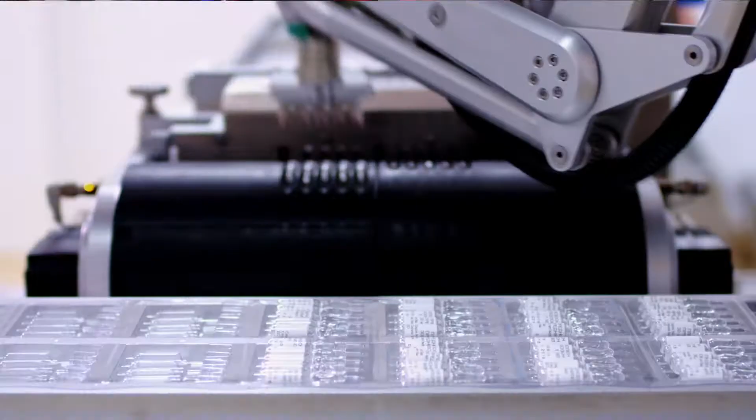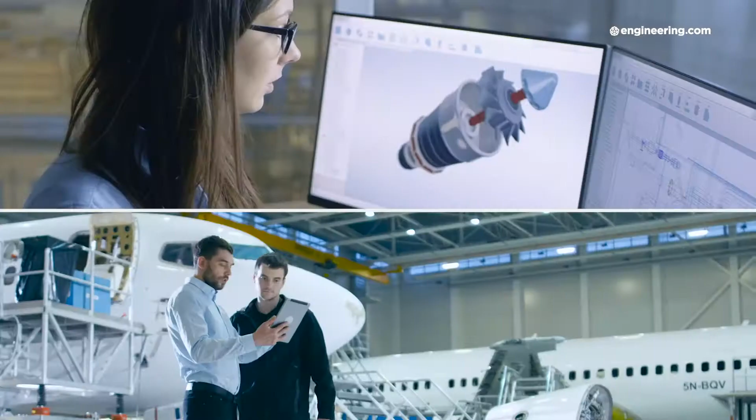One of the best parts about working here at Engineering.com is the opportunity to meet so many smart people in industry. Now, software has always had smart people, but the traditional intersection between software and engineering, CAD/CAM, that's morphed into something much bigger and much more important than most people realize.

I was a panelist at a recent roundtable hosted by Dassault Systèmes, their 3D Experience Forum, where I commented on the current state of the art in software-assisted engineering, model-based systems engineering.

We've all been watching advancements in artificial intelligence, augmented and virtual reality, simulation, and generative design, but these technologies, although important, they dance around the fundamental core of engineering.

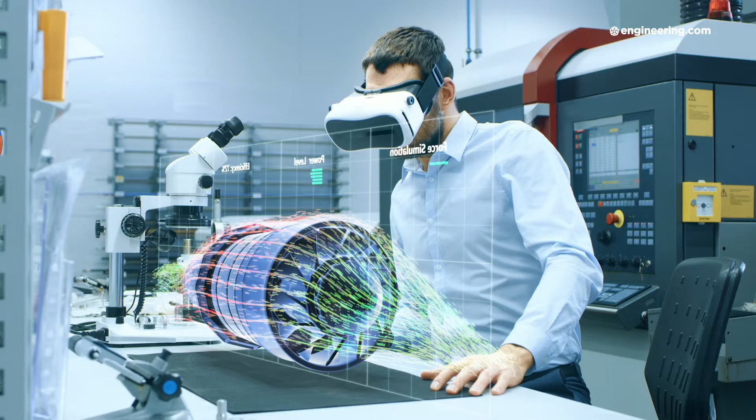Artificial intelligence does what human engineers do, presumably faster and with fewer errors. Augmented and virtual reality are the logical extensions of 2- and 3-dimensional rendering. Simulation is the virtualization of hardware-based R&D, and generative design is simply the automation of what every design engineer does every day in developing new parts and assemblies.

They're all essential, but they don't fundamentally change the way engineering is done. Model-based systems engineering, however, is different. This is about removing the handcuffs that constrain every modern engineering project: documents.

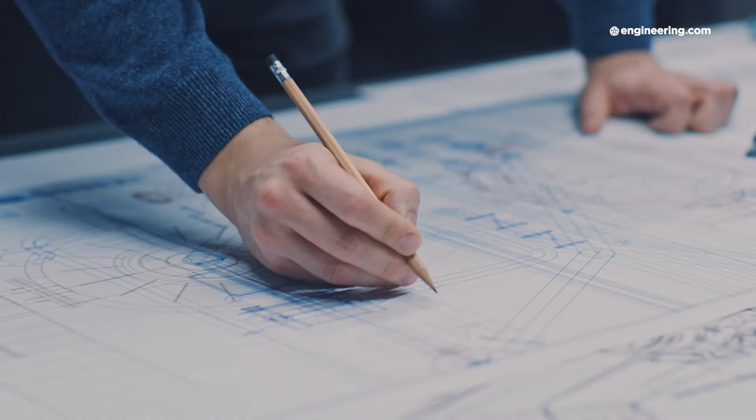System complexity in engineering has always been a problem, and with the advent of commercial digital computers in the 1950s, major defense programs became too complicated to effectively manage.

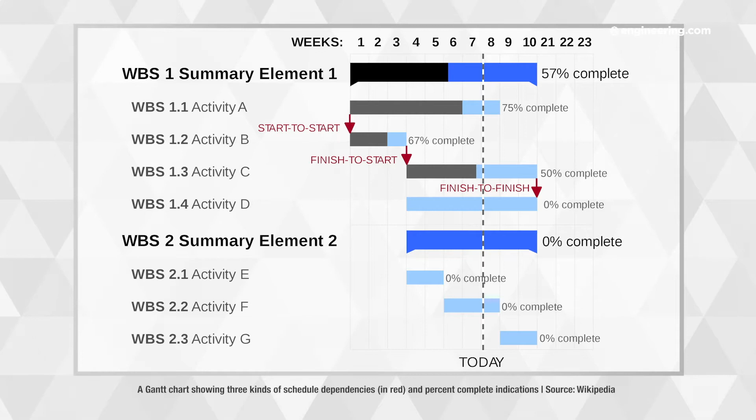Determining the critical path on a large Gantt chart was the only way to handle most problems, and the need to police revision histories on thousands of individual part and assembly drawings, plus associated documents related to testing, regulatory compliance, quality, and scheduling within major projects, that basically guaranteed that projects would come in late and over budget.

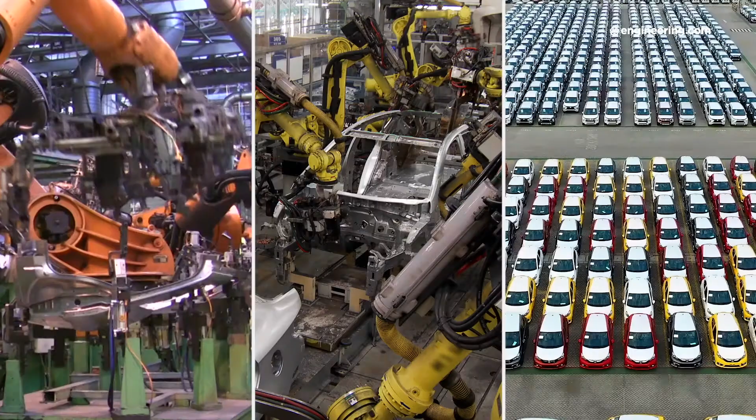Cost, delays, and the root problem of getting dozens or hundreds of engineers' designs to come together into sub-assemblies, assemblies, and final products, it's been a perpetual issue, whether the project was an electric toothbrush or an Apollo moon rocket. But why? In my opinion, there are two primary reasons.

The first was, and is, simple. Projects are costed relatively early in the design phase, and there's no way to effectively predict how much redesign may become necessary, or in the event of a poor design making it all the way to production, the eventual cost of rework. For large projects, especially in defense, the only way to get a big project across the finish line was either to price new projects at astronomical levels or negotiate cost-plus contracts, or both.

Now, the second reason was and is simple. With each individual engineer responsible for one part or one subassembly of a large project, their motivation and their metric of success is determined by the functionality, cost, and optimization of the single thing that they work on. Integration of that part into large complex assemblies like airplanes or automobiles was typically handled by a different engineering team responsible for integration.

The result was the inevitable negotiation and horse trading to get parts into subassemblies and then into assemblies and on into products. Now, all of this costs time and money.

The brilliance of model-based systems engineering is that a single digital concept of a large and complex product is accessible to everyone at every level of product development.

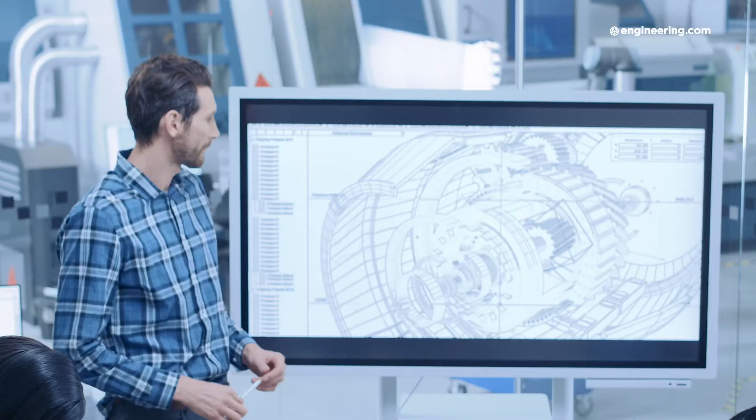An engineer may be responsible for a flange or bracket, for example, but he or she has the ability to see how it fits into the larger project, and also sees what the ripple effects are of engineering changes all the way through the process, from design revision to manufacturing.

This is incredibly powerful, and it adds a real incentive for engineers to think holistically about every step of the design process. Want to add a lightening hole to take mass out of that hypothetical bracket? Well, what if that design change affects the flow of cooling air past a circuit board?

With model-based systems, difficult to predict outcomes can be simulated and revealed before production begins, and with the transparency of the process, everyone can see that impact.

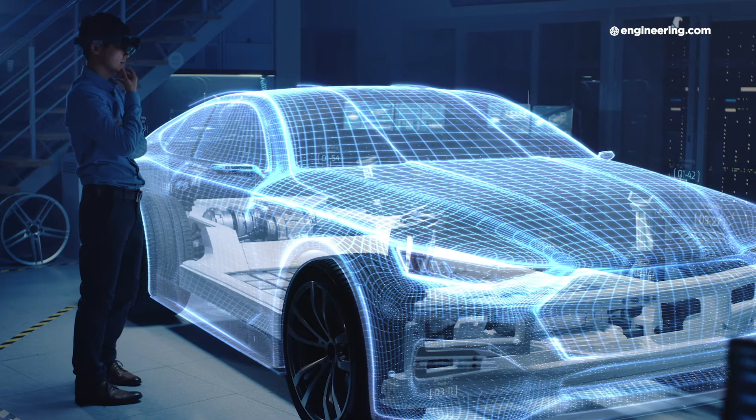But with engineers working in silos with traditional document-based systems, there's no way to know how a small change can have big system benefits, so suboptimal designs are almost guaranteed.

Model-based systems engineering has other benefits, and we'll be talking about that more here at Engineering.com.